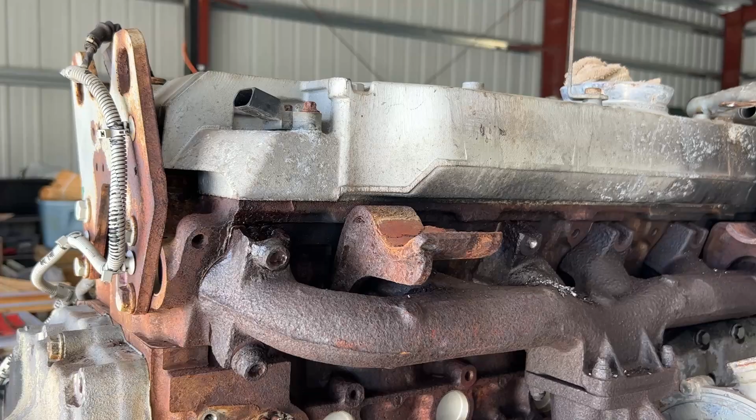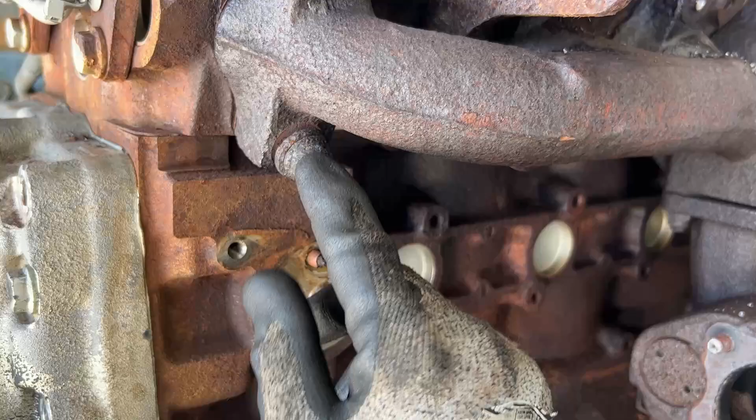The good news is almost all these bolts came loose. This one came loose, except for three: this one, that one which I've already drilled off the head, and that one right there. Hopefully when I drill this last one off, this thing will come right loose, and I'll be able to grab hold of the bolt with a pipe wrench or something and screw it out of there. If not, then we're going to be drilling up in the head and all that business. So we've still got our fingers crossed on success for those three.

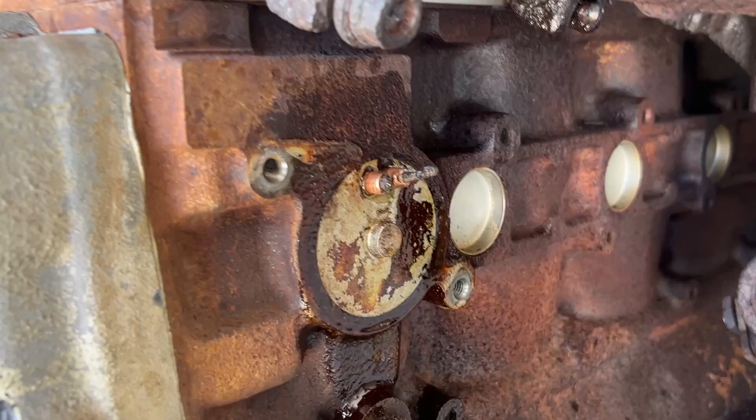Just working on getting the block heater out. That thing's pretty much welded in there. My engine didn't have a block heater, there's just a freeze plug in that hole, so that's what I'm going to do - get that thing out of there and put a freeze plug in it.

But it's coming along really well. It's starting to look even better, you know, with all that nasty crudy stuff taken off of it. I'll take the alternator off. And what have I done so far here on this side? I took the cover off. I guess that's about it.

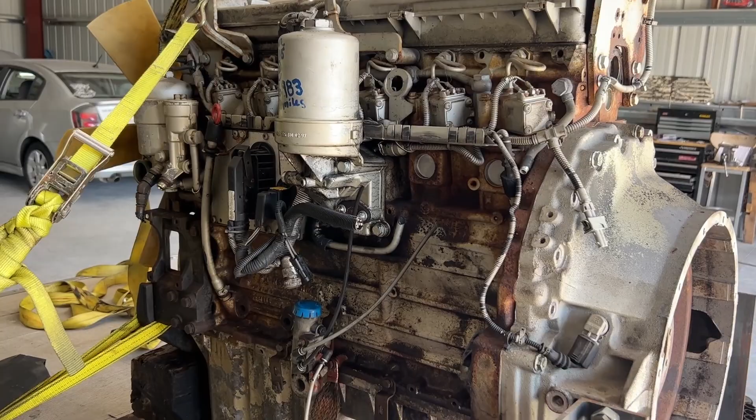I did some validating. My flex plate does line up with these bolts, so that's perfect.

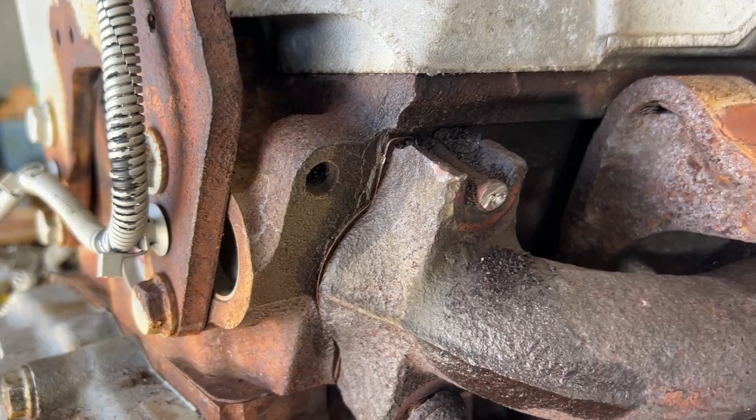Okay, got that one. The tip of my little drill bit broke off up in the hole there, which was going to pose all kinds of different problems. So I just used my cutoff on this one, cut through it, and broke it off the rest of the way. So now we're loose. Let's get this thing off of there. Wow, I didn't think this one was going to come out. I actually put some heat on it, not much, just that little propane torch.

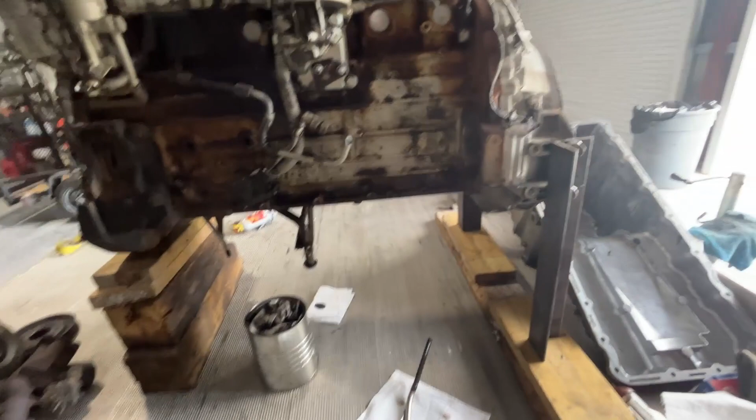I got the oil pan off right here, and I've already wiped this out. It has no crud in it, other than the expected thin layer of sludge at the bottom down there. No dirt, no metal, everything looked good.

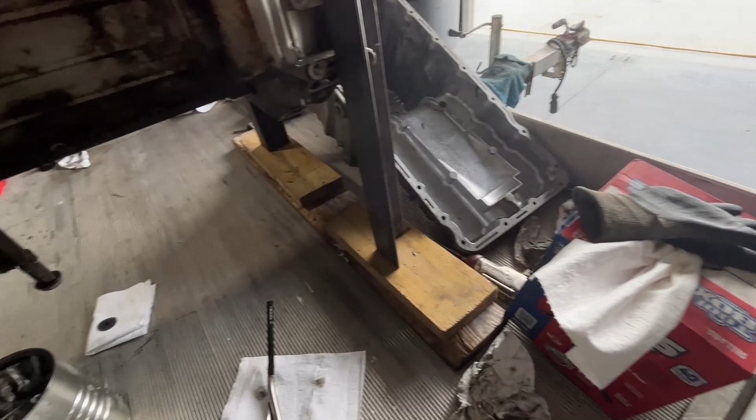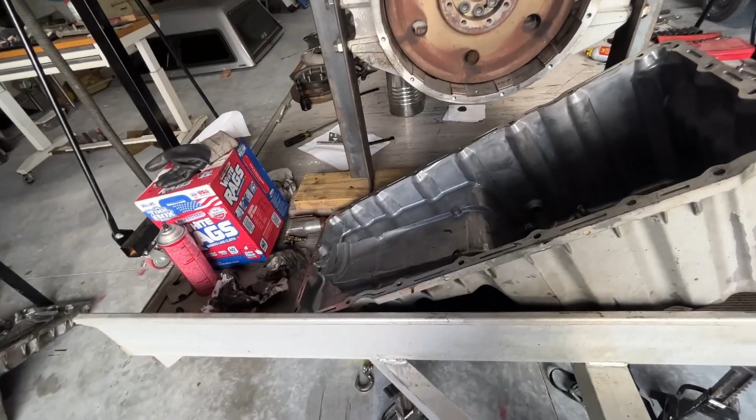I brought my pan from my engine over here to compare it. They're identical looking pans. I'm going to put this one on there just because it looks a little bit better on the outside, and it's a little cleaner. I could just spray that out with brake clean and it's ready to go. I guess I could do it to both of them. But underneath is clean.

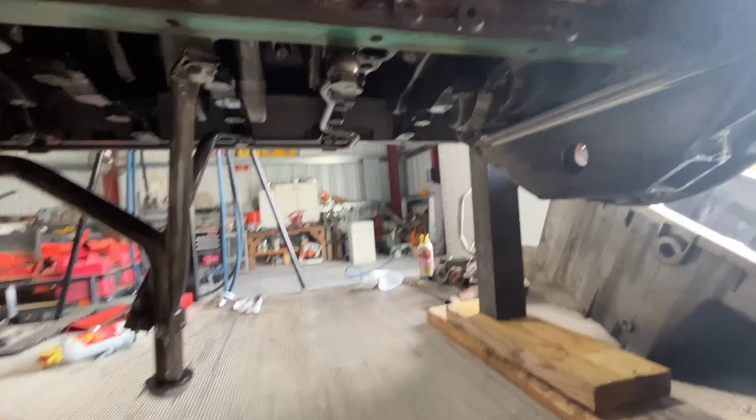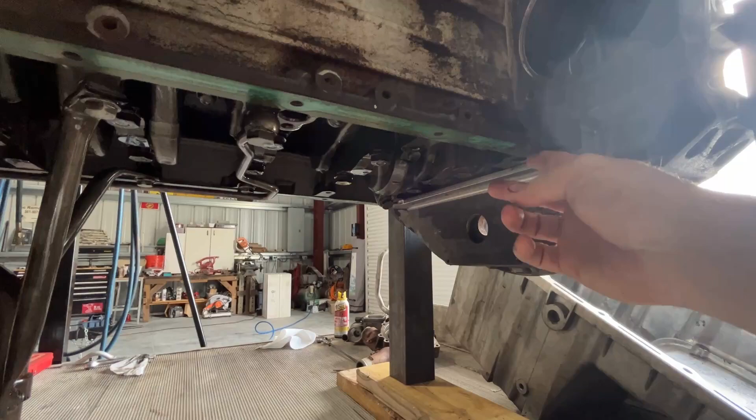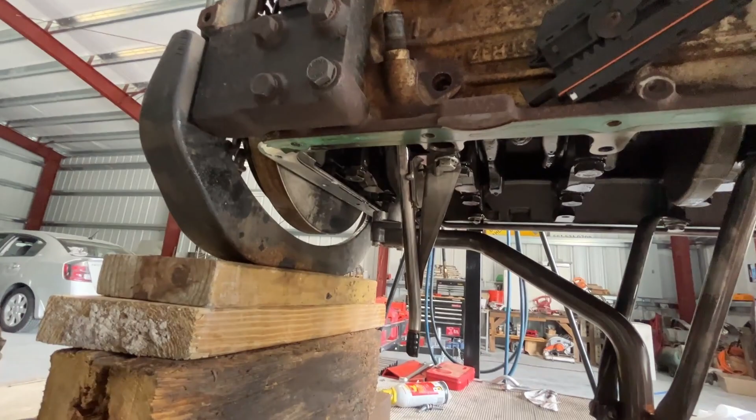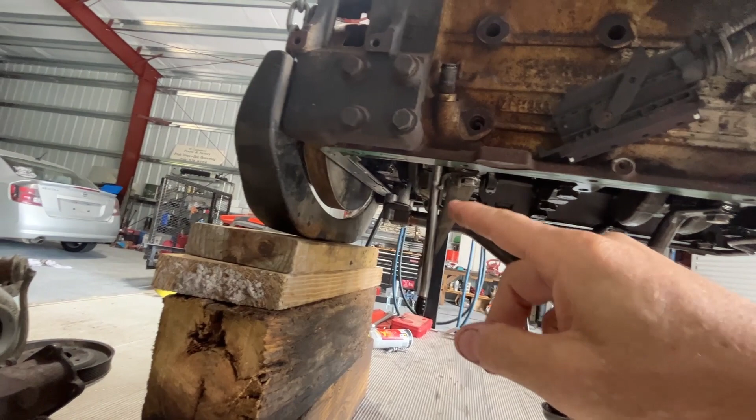I broke the gasket, darn it. But I think what I'm going to do is save myself $40 and 2 weeks waiting, and just put a little bit of RTV on the break area and stick it back in. I think it'll be fine. I mean, they're 2-piece gaskets anyway, or 3-piece, 4 pieces - it's like a jigsaw puzzle, little thing right here. And over there is where it tore. Over here, same kind of thing - it came apart at the joint, and over here it tore. So I don't think it's a big deal.

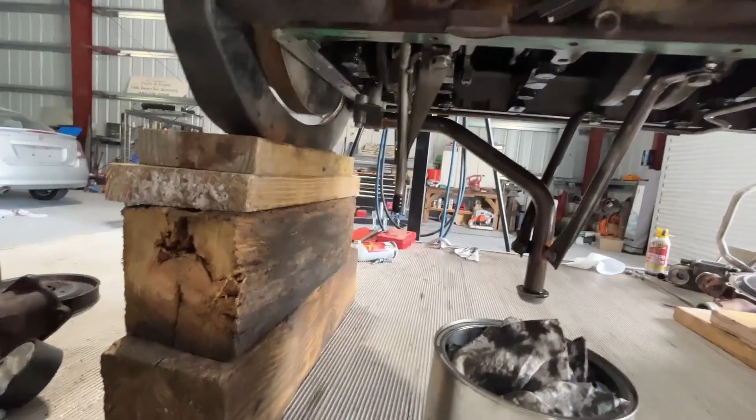What I did notice is this was laying in the oil pan. I think I might have broke it. This goes at the end of the dipstick tube right here. I didn't recall seeing it get broke, but I got the one here off of my engine. I'm going to swap that out now. And I don't think I have any RTV.

I'm going to go check real quick. If I do, I'm going to put this pan right back on. Oh, no, I'm not going to put it right back on. I guess I could put it on just to keep the dirt out.

But I'm going to rotate the engine to top dead center on number 1 and go through the sequence of adjusting the rocker arms. I don't know how to...

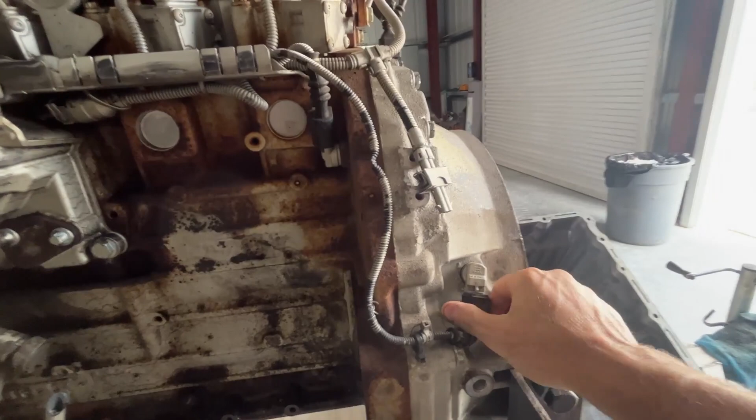Tell when this thing is on top dead center number 1 from the outside. I mean, it's not like you can pull a spark plug, right? I don't know how. I know that the flywheel has this pickup, and it has an extra hole in the flywheel, and that might be how you tell if it's number one or not, but I'm going to find that out now so I can rotate the engine around.

And also I'm going to look up in the cylinders, each of them, and make sure that nothing looks awry in those.

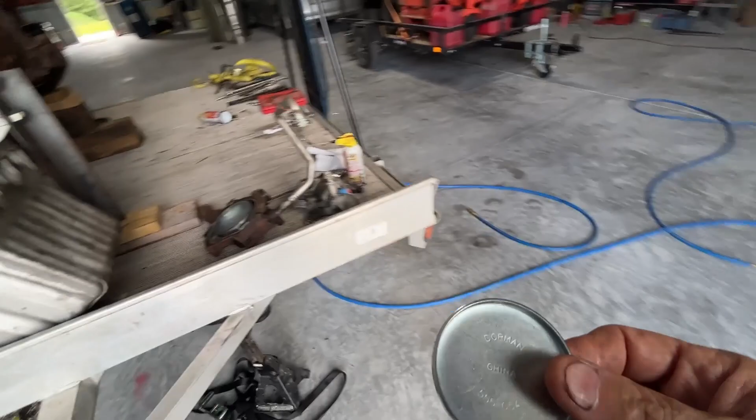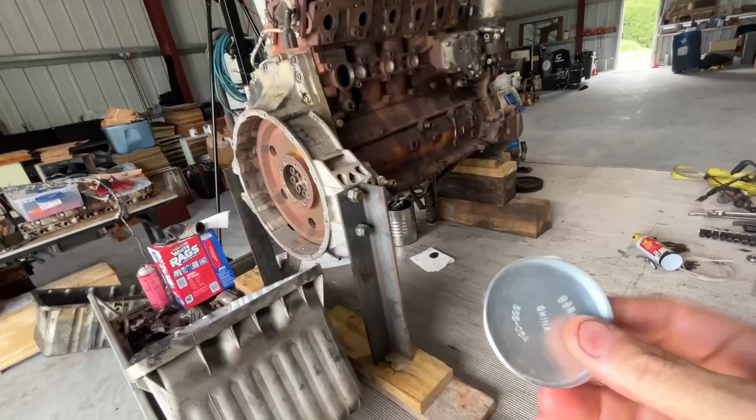And we got our freeze plug. I think I might have mentioned this already. This is the freeze plug that goes at the back of a camshaft on a V8 engine, I think it's a Chevy 3.8 V8 or something, and it's just the right size for this. I called Detroit, they want like $38 for this thing. So I got this for $2.09 from O'Reilly Auto Parts. So that was a win.

All right, starting to get exciting.

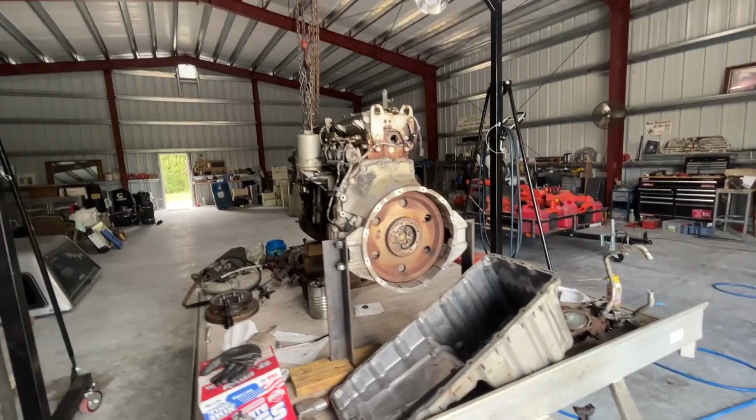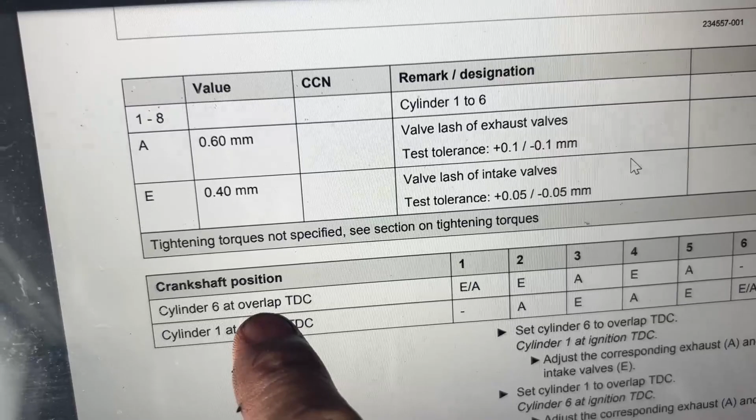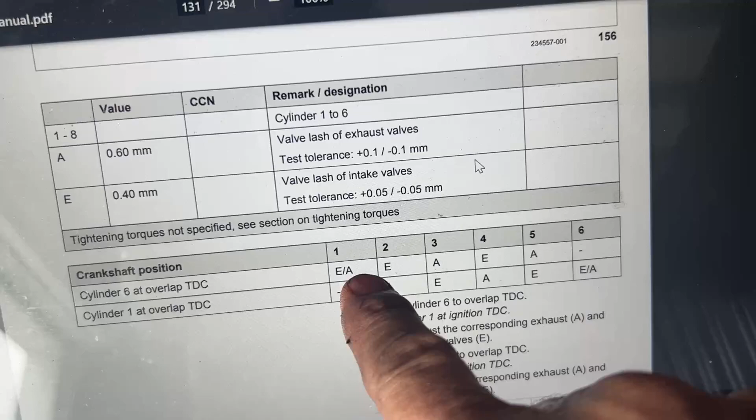All right, we're putting number 6 at overlap, which is the same thing as number 1 on ignition, because they're running mates. E stands for intake and A stands for exhaust. A is exhaust, E is intake.

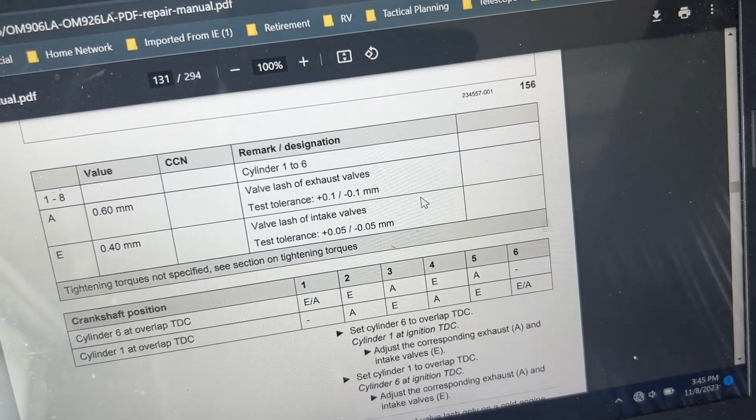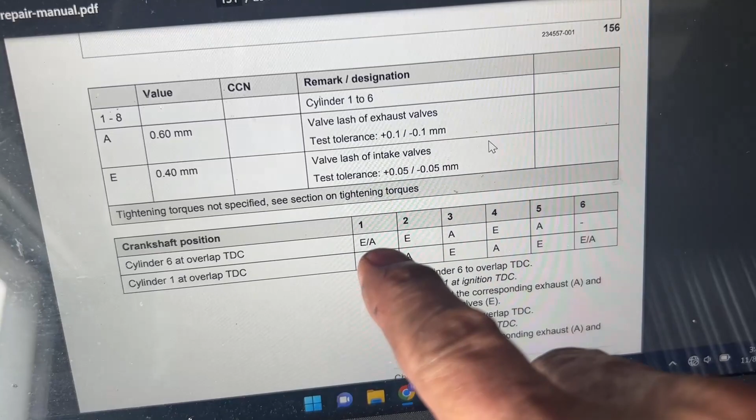So I got two feeler gauges, one with the minimum and one with the maximum. And right now, I just did the intakes, which is 1, 2, and 4.

All right, let me zoom out a little bit. This is 14 thousandths, and it fits right in there.

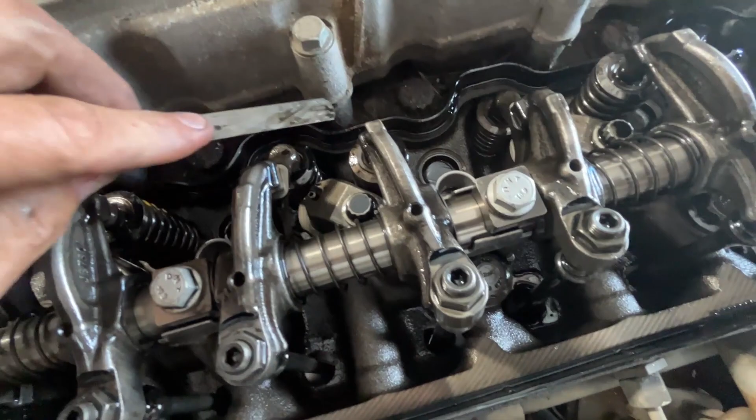The intakes are the ones with the bridges. So that's intake, this is an intake, fits right in there. And now number 4, which is 1, 2, 3, 4, right here. All right, so it fits right in there.

And now here's a 17 thousandths, and it will not go in. Same here and there. And I already did the exhausts.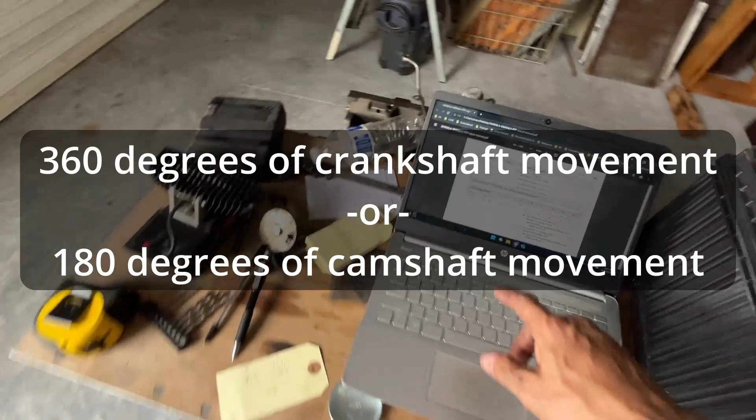So now we got to rotate the engine 360 degrees to put it on cylinder number 1 at top dead center of overlap.

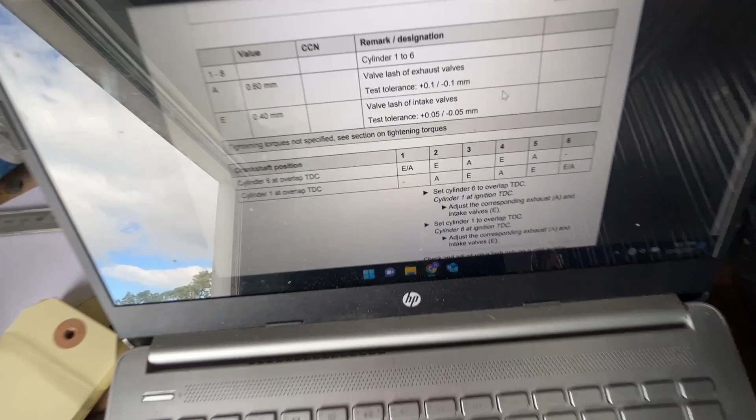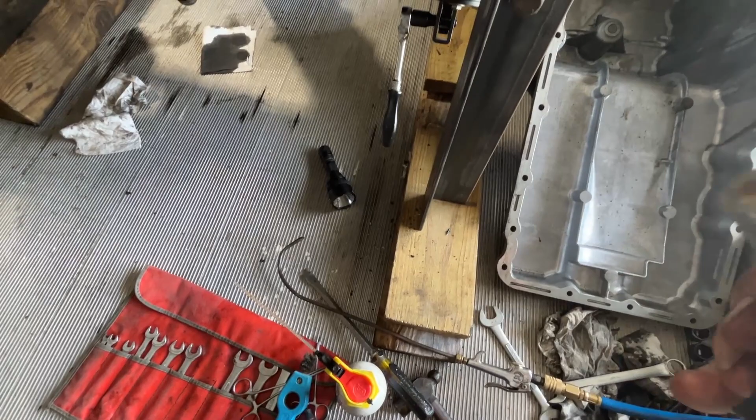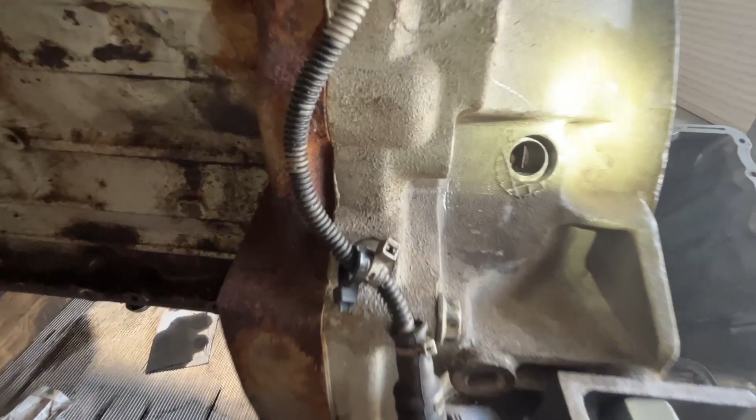And we do those cylinders. So to get the top dead center, I pulled out the crankshaft sensor, which I had to destroy. I'm pretty sure this is ruined because the hole was all corroded between the aluminum and this stainless steel keeper. But if you look down in that hole, you can see there's a hole in the flywheel down there. There you go. So that gives me my top dead center.

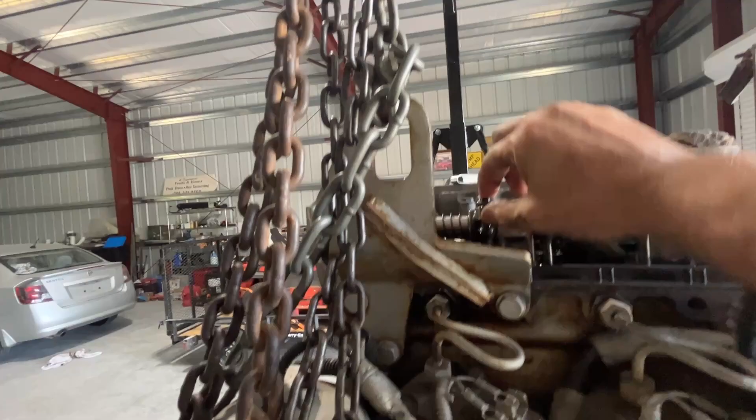And I was looking up in the oil pan to know that number 1 is all the way up. And when these are loose, that's compression. Number 6 is on overlap, so they're both tight.

All right, so now we're going to turn the engine 360 degrees and get number 1 and 6 back to the top, but one full rotation. And the cam will have turned a half turn, so 1 will be on overlap and 6 will be on ignition.

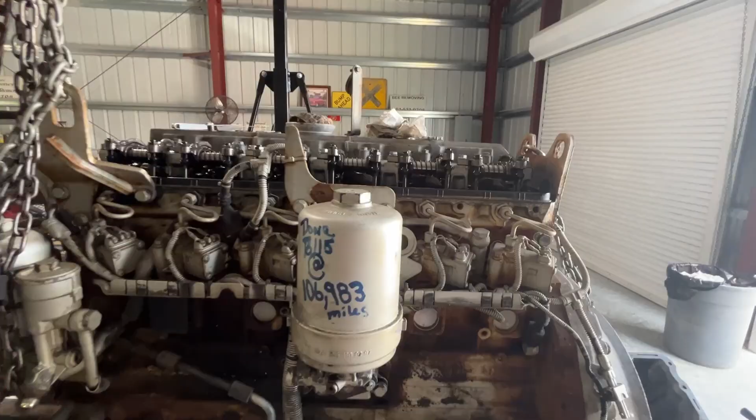All right, one rotation of the crank. And now number 6 is on ignition and number 1 is tight. That means 1 is on overlap. And now I got to do the same operation on the other 3 cylinders and I'll be done.